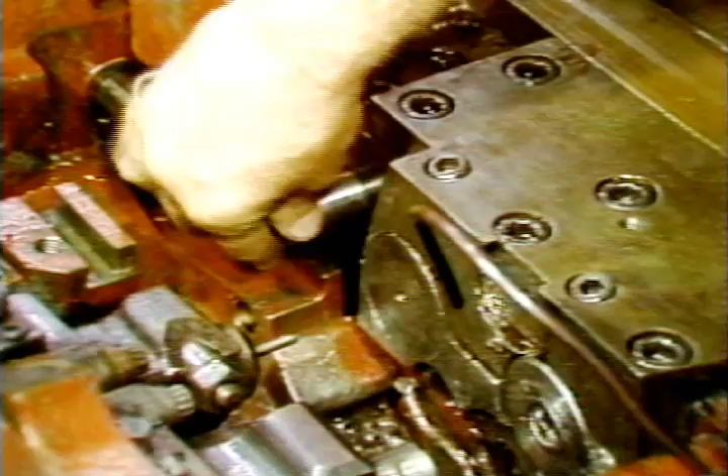During normal operations, the quill will have to be turned 180 degrees as the edge that does the shearing becomes worn.

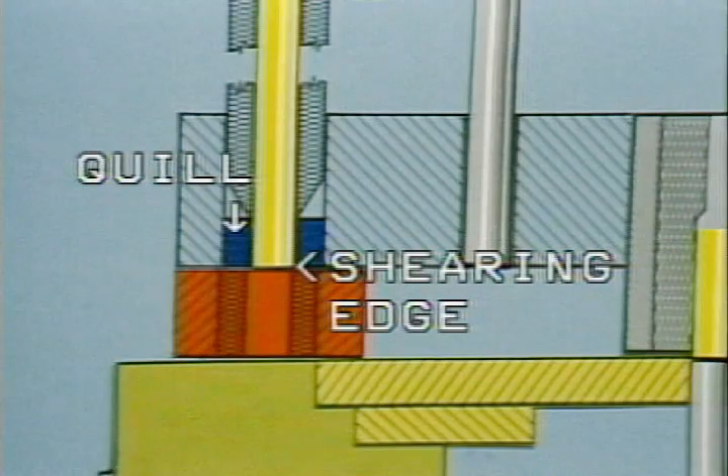The shearing edge is the edge closest to the pusher. When both edges of the quill have become worn, the quill must be removed and sharpened.

To remove the quill on the Model 1012 header, swing the second transfer assembly out of the way.

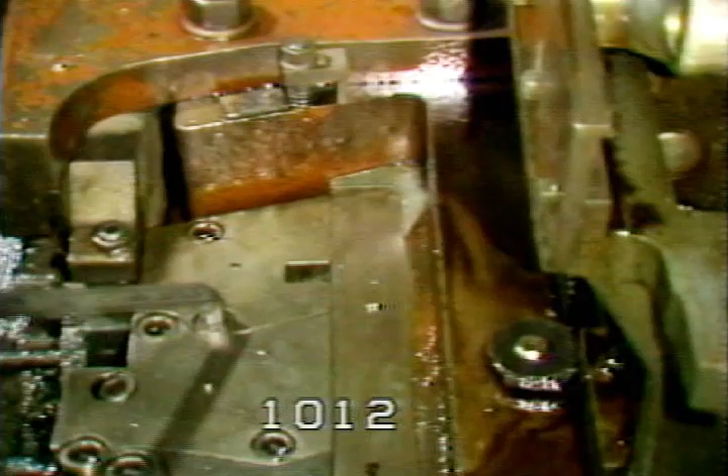This is the quill cap. To remove the cap, first loosen the quill cap screws. Thread a circular pull bolt into the cap and pull off the quill cap.

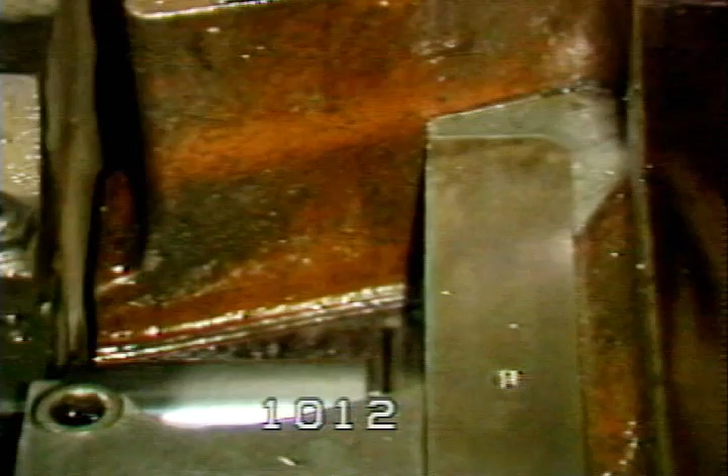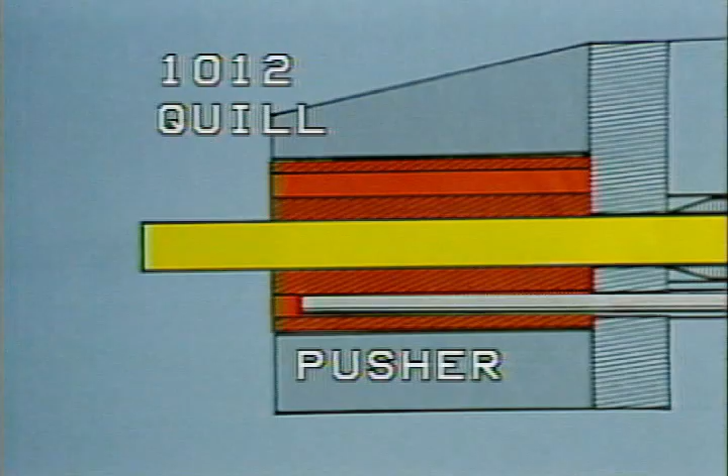The quill for the 1012 has an additional hole which is used for the pusher. The pusher must be retracted from this hole in the quill before it can be removed.

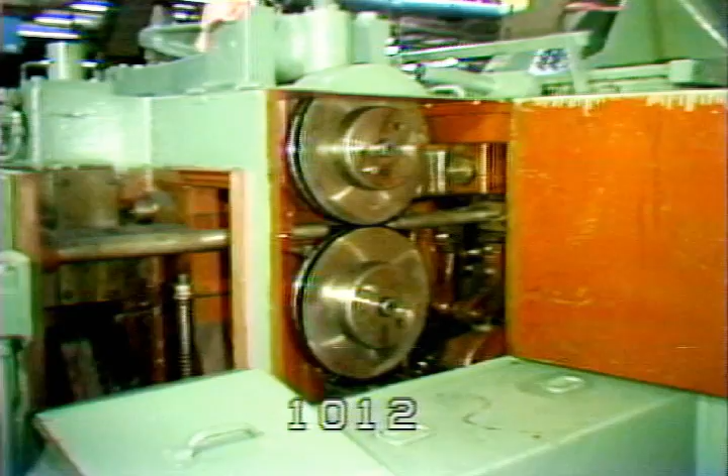Open the covers over the feed roll area. Locate the pusher rocker arm and clamp finger in front of the feed rolls.

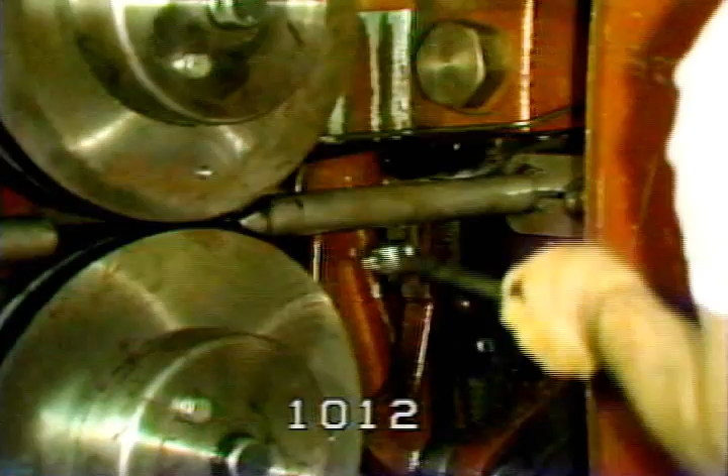Loosen the lock nut and slide the clamp finger down. Lift up on the T-bar end of the pusher and slide the pusher out.

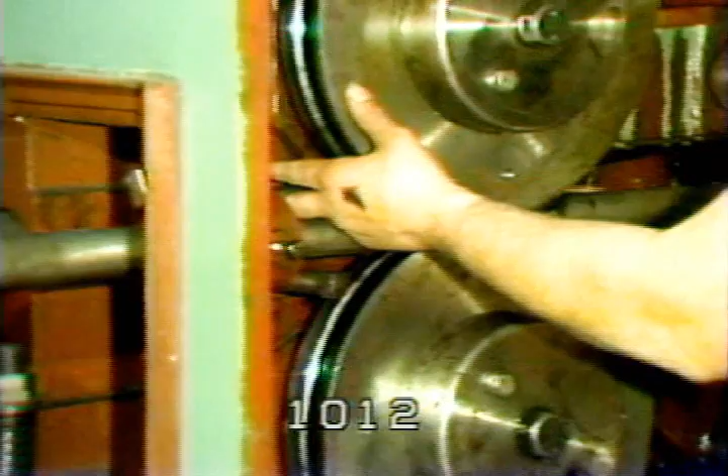If wire was loaded into the machine, it must also be pulled out of the quill. You may now remove the quill from the 1012 quill pocket.

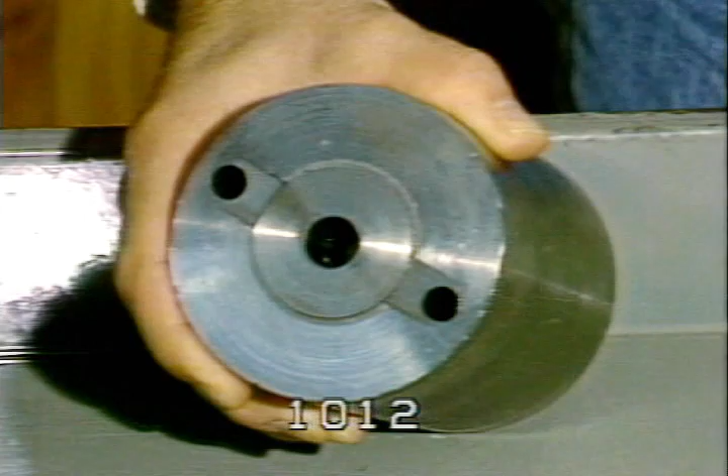This is a quill from a Model 1012 header. The quill has 2 pusher holes in it so that if a cutoff burr appears, the quill can be rotated 180 degrees to replace the shearing edge with the sharp edge.

To replace a 1012 quill, clean out the quill pocket and quill cap.

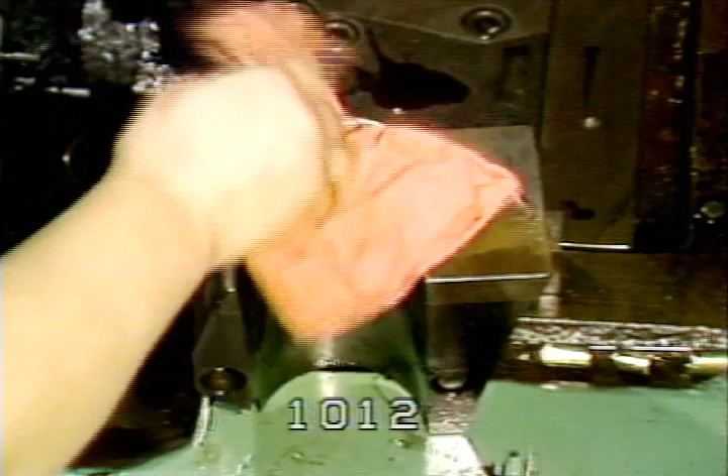Install a sharpened quill with the correct size wire hole. Rotate the quill to align the pusher hole with the pusher, then push the quill forward in its pocket.

Whenever you change to a smaller diameter wire on any machine, check the size of the pusher to be sure it will fit through the cutter. If the pusher will not fit through the cutter, it must be replaced.

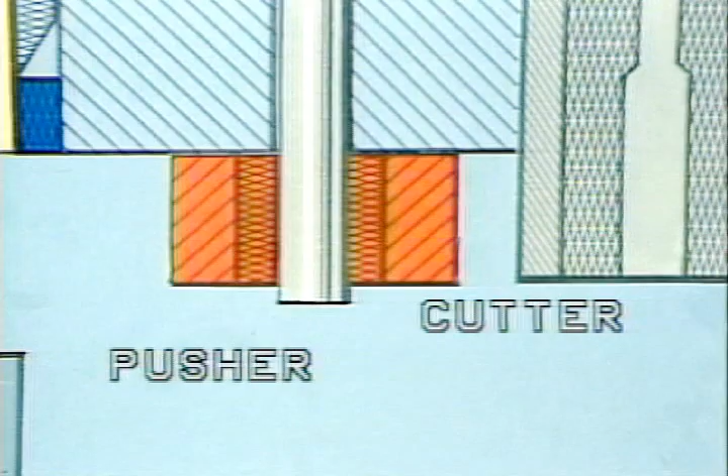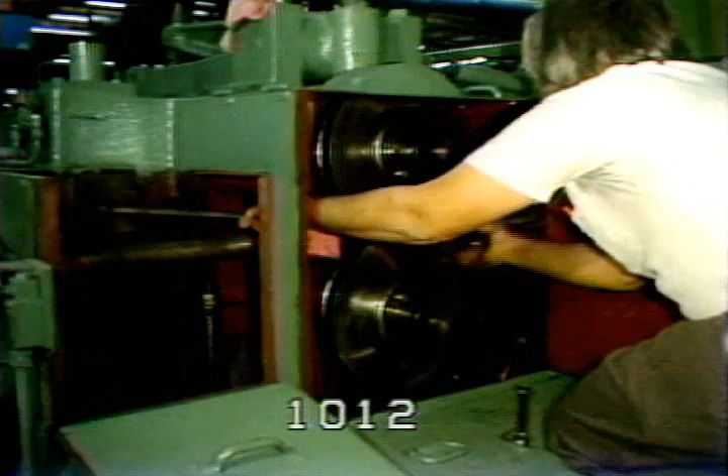Clean and install the pusher. Fit the T-bar in the finger clamp and tighten the lock nut.

Replace the quill cap and screws. Snug down the cap screws.

Jog the machine until the cutter lever moves back as far as it will go. In this position, the cutter and quill can be adjusted for alignment. You can now mount the cutter.

Hold the cutter in place and thread in the attaching bolt. Be sure the hard washer is mounted on the attaching bolt.

Use a wrench, but do not fully tighten the attaching bolt at this time. Snug down the cutter clamp screw.

Place a straight piece of the correct size wire into the cutter. If the wire does not pass smoothly into the quill, use the wire to find the location of the quill hole from the cutter hole.

You will then need to align the cutter to the quill. The cutter is held in the lever by 3 screws.

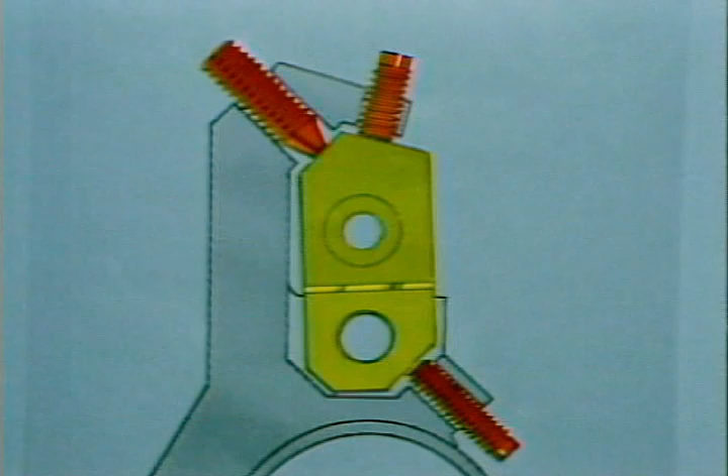This upper vertical adjustment screw and the lower horizontal adjustment screw are used to align the cutter to the quill.

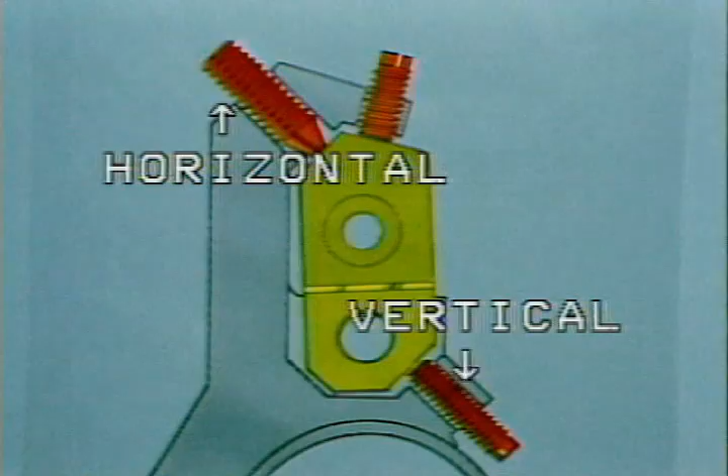With the clamp screw loose, tap the cutter with a soft hammer to seat the cutter against the horizontal adjustment screw.

Then turn the lower vertical adjustment screw in or out as required to align the cutter.

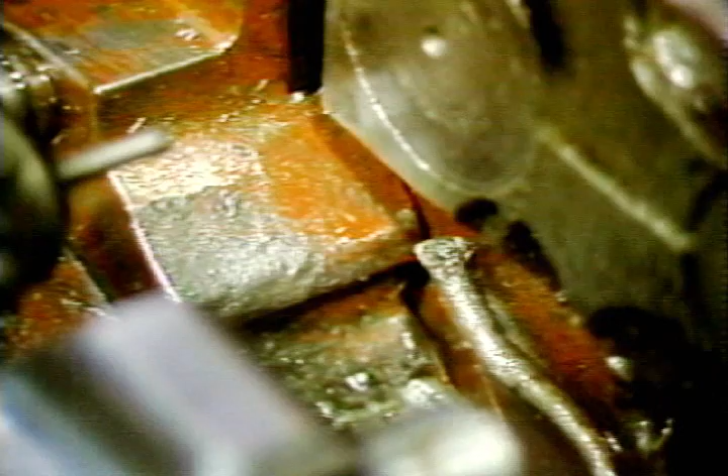Then turn the upper horizontal screw into contact with the cutter and tighten the clamp bolt.

If the horizontal adjusting screw is not accessible on your machine, reseat the cutter if necessary with a tap from a soft hammer.

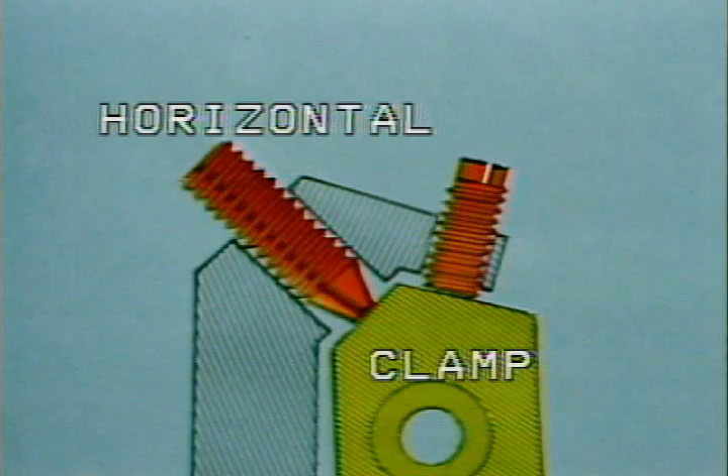Finally, tighten the attaching bolt.

Recheck the alignment and repeat if necessary by first loosening the clamp screw and the attaching bolt. If the sample wire passes through both the cutter and quill without any drag, then retighten both the clamp screw and attaching bolt.

During operation, there can be 5 different causes for an incorrect or distorted cutoff.

First, the quill may be dull. Second, the cutter may be dull. Third, the cutter and quill wire hole may be too large in diameter. Fourth, the cutter may not be correctly aligned to the quill. Or fifth, the clearance between the cutter and quill may be incorrect.

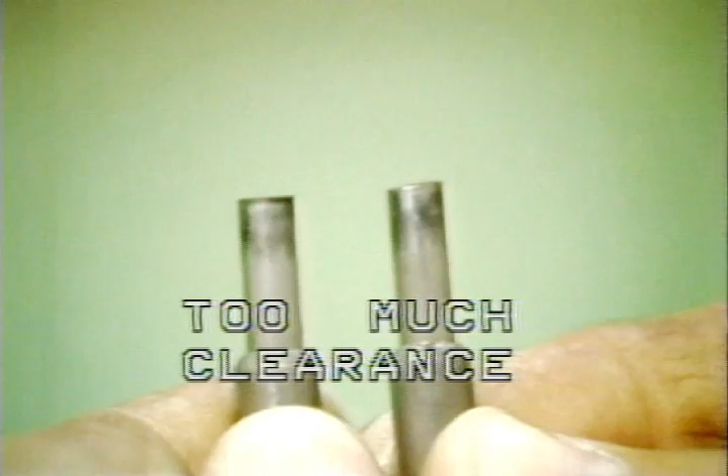If the cutter and quill clearance is too great, the blank will look like this. If the clearance is too little, the blank may look like this.

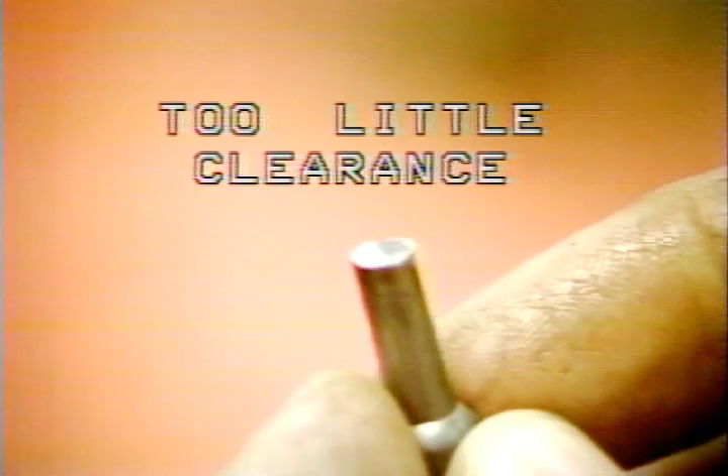The actual amount of clearance between the quill and cutter will vary with the size and type of wire. Soft steel wire may require more clearance, while harder steel wires will require less clearance.

Locate the drawn wire diameter in your setup sheet.

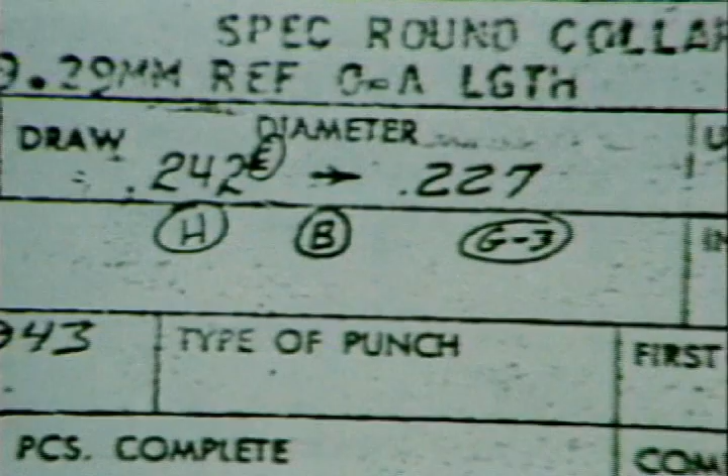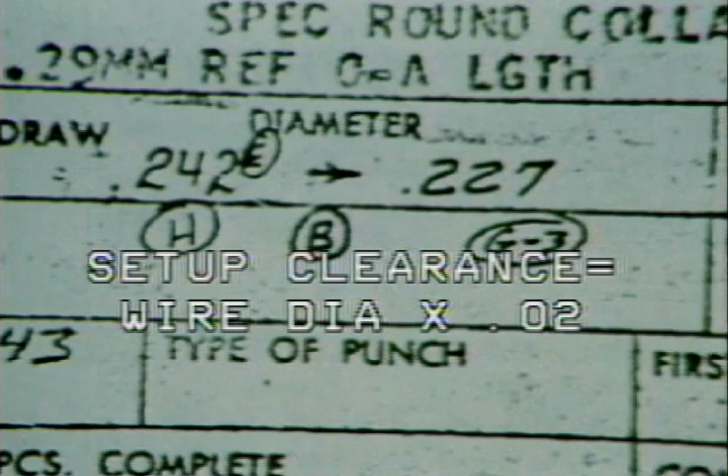As a starting clearance for a new job, multiply the wire diameter by 0.02. For example, if you will be running wire with a drawn diameter of 0.227, multiply this by 0.02. This will give you a setup clearance of approximately 5/1000ths of an inch as a starting point.

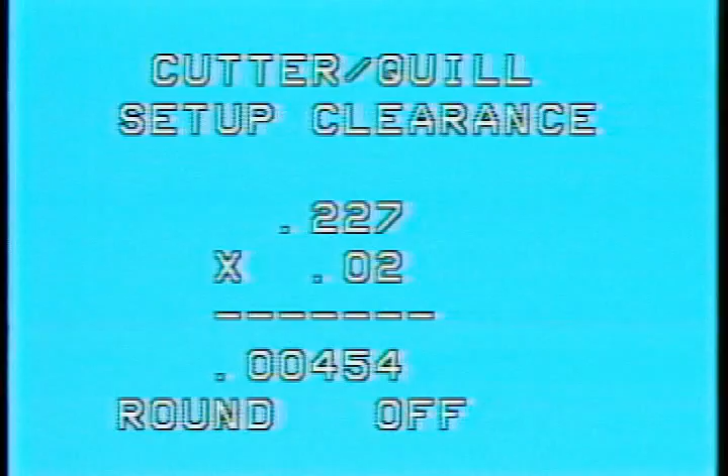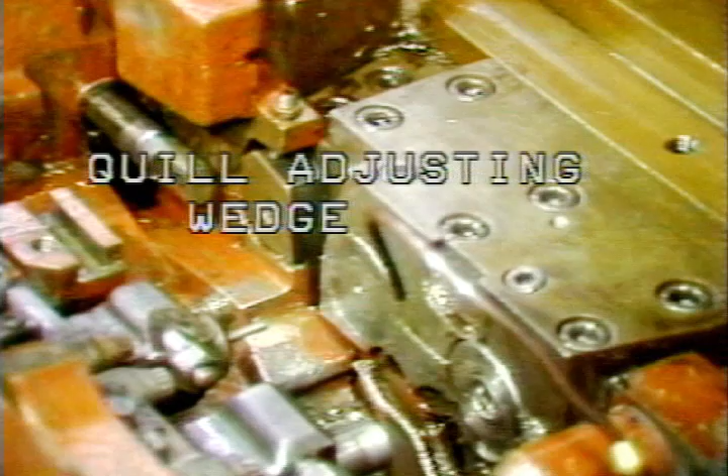Select shim stock or a feeler gauge of the correct dimension and insert between the cutter and quill. The gauge must be snug, but can be removed without pulling too hard. To adjust the clearance, loosen the quill clamp screw.